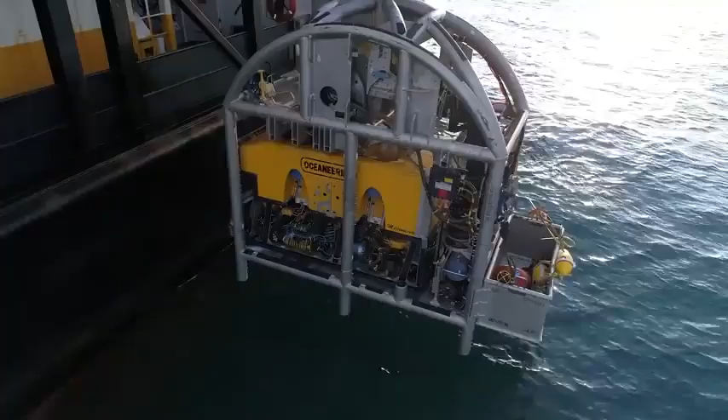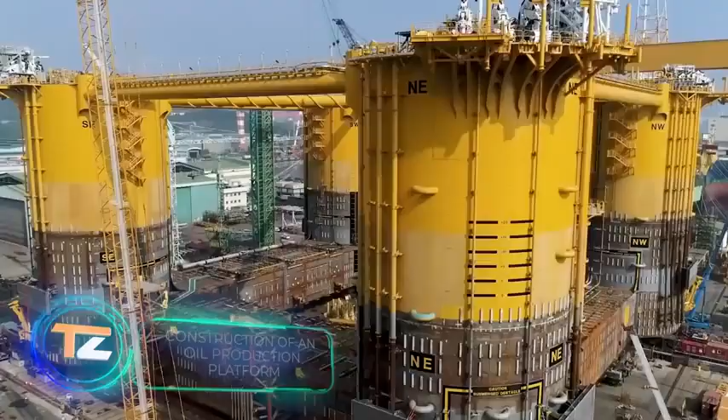Construction of an oil production platform. Appomattox Field is one of the largest oil deposits in the Gulf of Mexico. The British-Dutch company Shell built a new generation platform to extract oil there. Its dimensions are astonishing: 16 stories high and about 2 football fields wide. The rig weighs even more than an aircraft carrier.

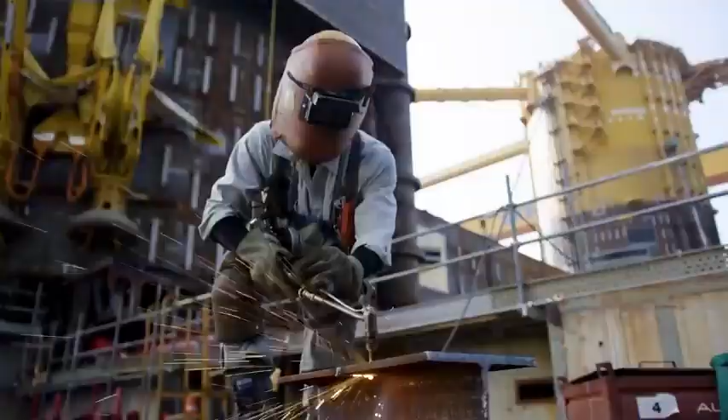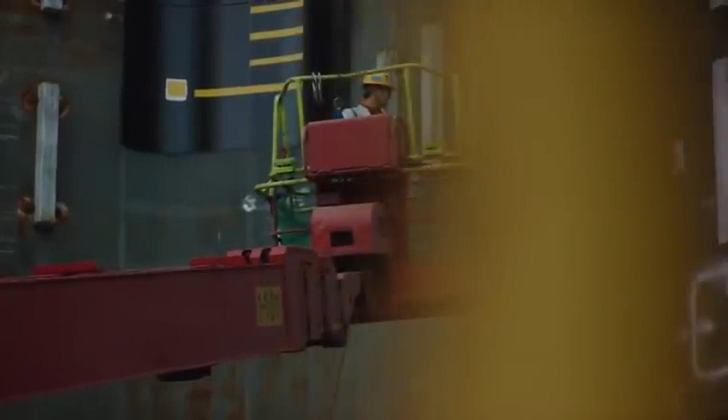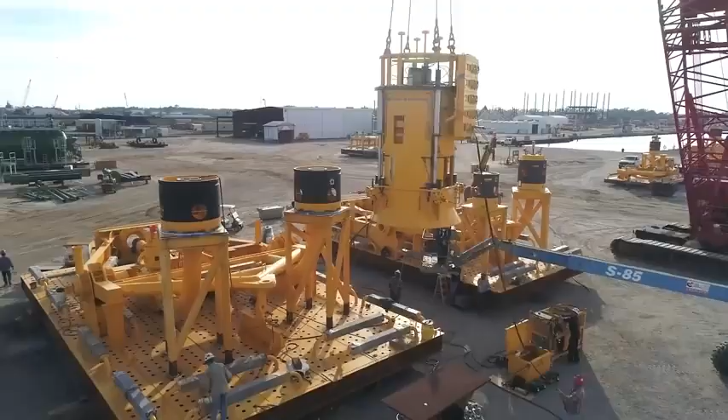Construction took about 4 years and took place in Geoje, South Korea. Several hundred engineers faced a real challenge: they had to build the most environmentally friendly, durable and large platform Shell had ever made. The plan called for a minimum lifespan of 40 years, double the lifespan of nearly all platforms built in the past. The complex construction process was broken down into several stages.

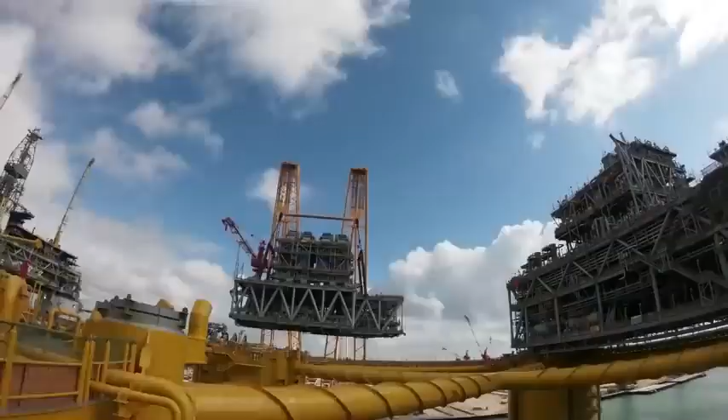The individual modules were first made in an onshore workshop. They were then lifted with a huge crane and assembled into a single structure. This took place on the water. The builders themselves described the entire process as assembling a giant three-dimensional puzzle.

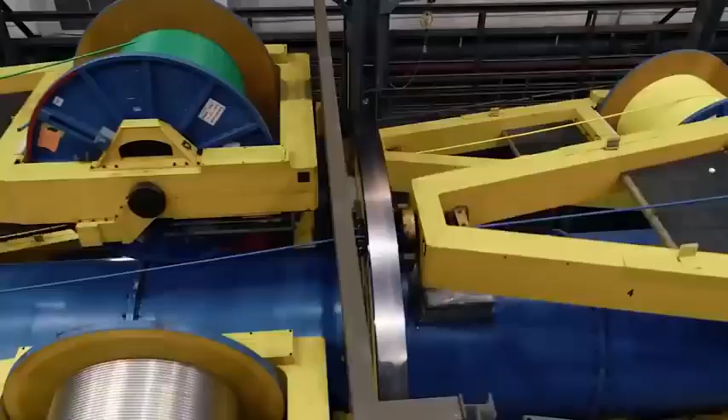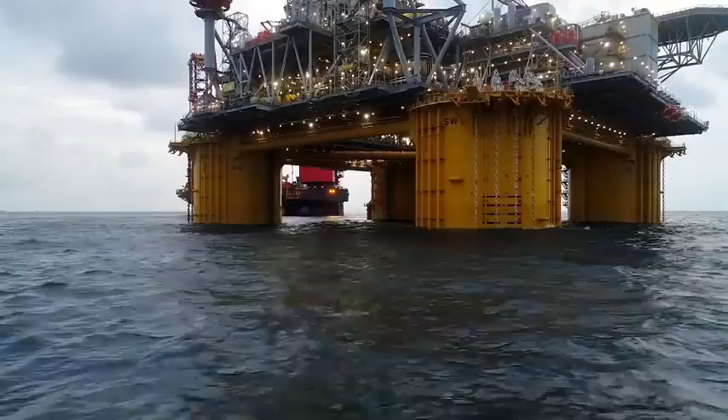Traditional oil rigs run on diesel fuel. In this case, however, it was decided to use electricity to make the project more environmentally friendly. The power of the generators installed on board reaches 150 megawatts. This is enough to supply electricity to about 100,000 homes.

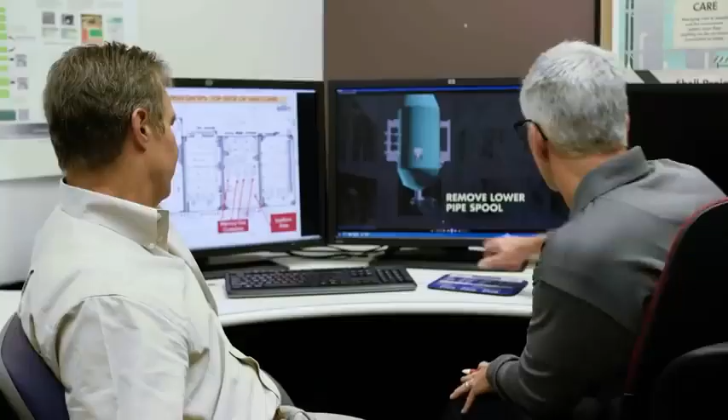But the engineers encountered a problem: the production of such an amount of electricity releases a huge amount of heat. Estimates showed that about 2.5 million barrels of water would be needed daily to cool the plants. By comparison, that's roughly the same amount of water needed per day for a city of 2 million people. This was too much for a platform that was supposed to be green.

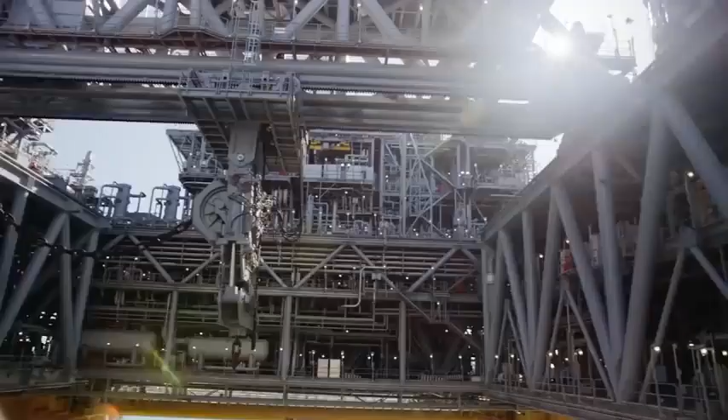So the engineers came up with an extremely interesting solution. Cooling water is taken from great depths, where its temperature is much lower. As a result, this reduced consumption by half.

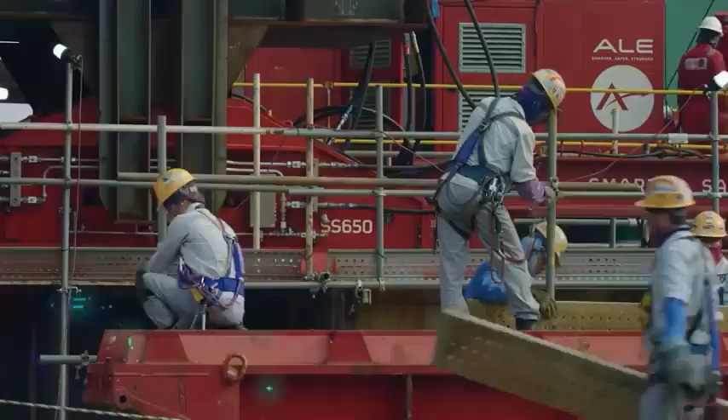Platform transport. Construction is not the only challenging part of launching oil platforms. The second most difficult challenge is transportation. To get from the South Korean shipyard to the Gulf of Mexico, the platform has to travel 14,500 miles, through the East China Sea, the South China Sea, the Indian Ocean, and then the Atlantic Ocean.

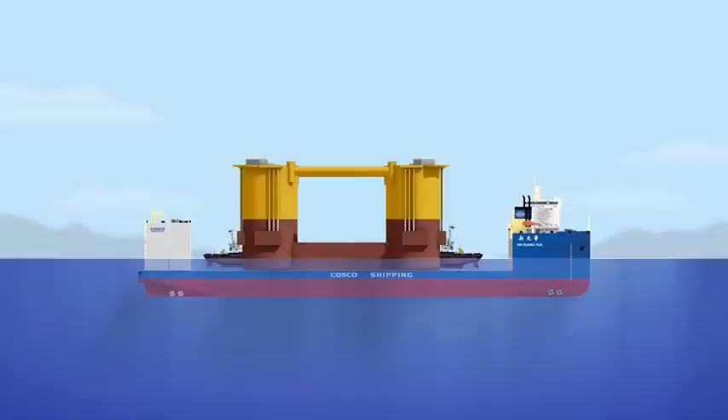Heavy lift ships are responsible for transporting such huge multi-ton structures. Their construction is unique: the deck is first submerged, allowing the platform to be placed above it. Then, when the deck is raised back up, the cargo is firmly secured above water and is ready to be transported. In this case, the Chinese vessel Xin Guang Hua, with a lifting capacity of about 98,000 tons, was chosen for the task.

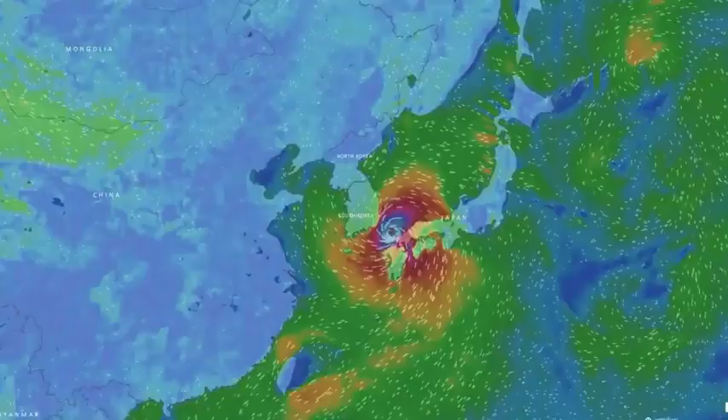Note that the weather conditions made things even harder. It turned out that a massive storm was approaching the shipyard from the Pacific Ocean. In order to avoid being affected by it, the work had to be accelerated considerably. The work crew alone was tripled for a short period of time.

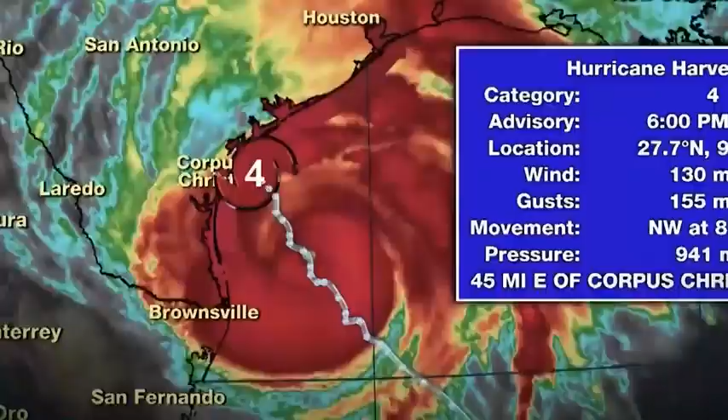Then, as the platform was already approaching the Gulf of Mexico, it was hit by Hurricane Harvey. Fortunately, all difficulties were overcome. After a 6-month layover in Ingleside, Texas, where the last construction work was completed, the platform finally arrived at its final destination.

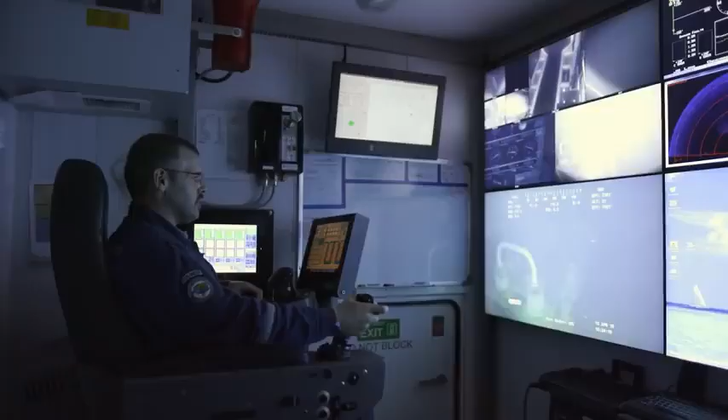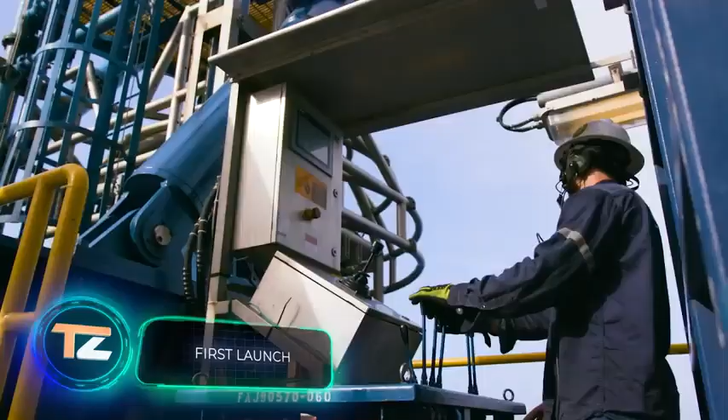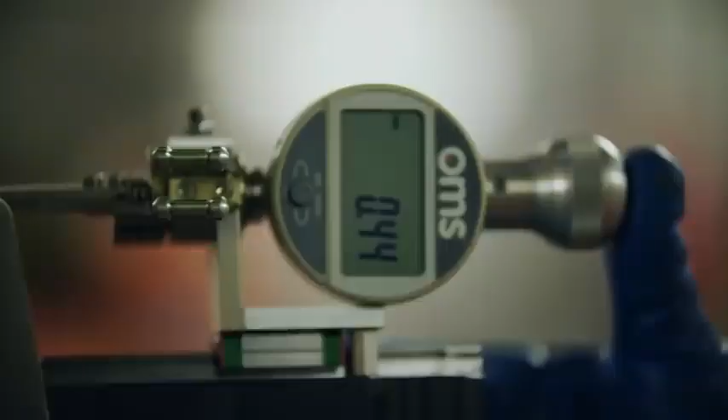First launch. Starting the circulation system in the platform and its official launching are extremely important events for all the people involved in the project. After all, this was preceded by 7 years of hard work. That's how long it took for the drawings and plans to turn into a real multi-ton structure. What you see on your screen now is the result, which required more than 15 million man-hours.

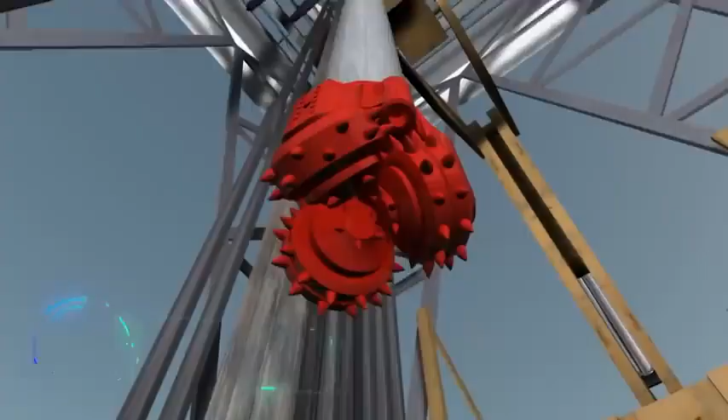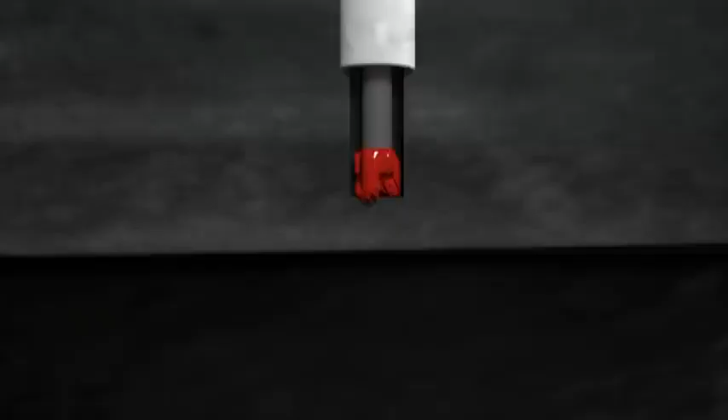Drilling. However, before an oil production platform can begin operation, a floating drilling rig must first drill the bottom of the ocean. Planning for this step can also take years. Specialists carefully study the sea floor to select the most suitable location to achieve maximum productivity and safety. In the case of Appomattox, the Gulf at its location is 1.5 miles deep. The oil itself is found even deeper, about 2.6 miles below the sea floor.

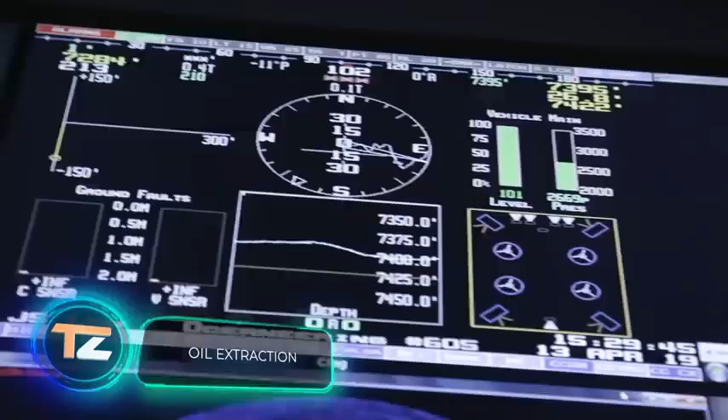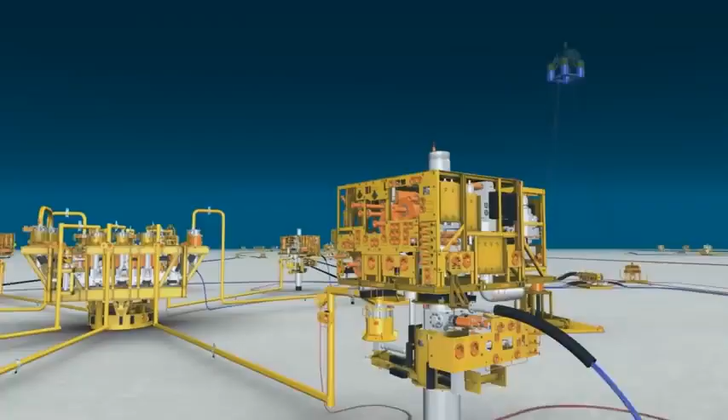Oil extraction. An oil production platform is more complicated than it seems at first sight, and it's not limited to the above-water structure alone. Before transportation begins, an underwater pipe system known as a Christmas tree is installed on the seabed. In this case, it consists of about 200 miles of complex piping connected to various types of equipment. In simple words, this system allows operators to regulate well operation modes and control the flow direction of the oil products. The total weight of this structure is 200,000 pounds.

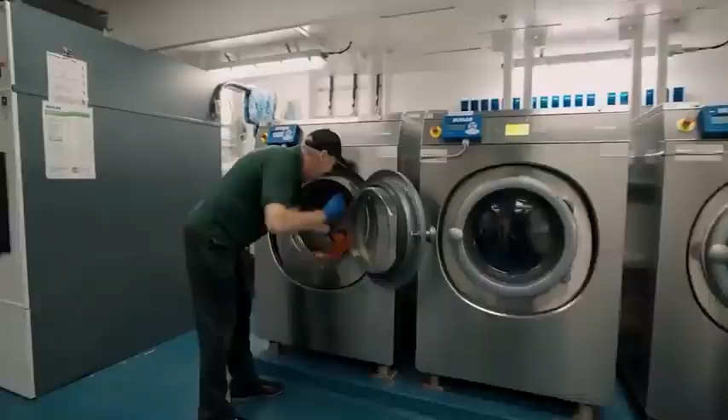The life and work of the employees. Oil production platforms can be hundreds of miles offshore, so personnel not only work but also live on them. Work shifts usually last several weeks. The number of personnel can reach a couple of hundred people, and comfortable living conditions are created for all of them. Workers live in small rooms, 2 people in each. They spend their free time in special game and music rooms. Separate employees are hired to serve the staff as well. They clean the cabins, work in the kitchen, and laundry. By the way, they do 3,500 pounds of laundry a day.

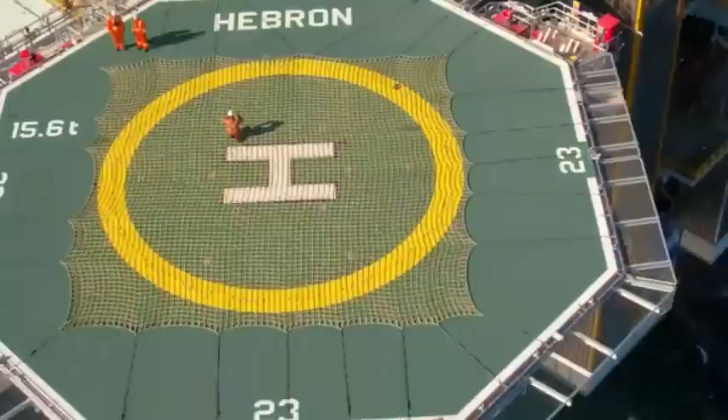Oil tankers. A single oil production platform can extract up to 5 million tons of raw materials per year. This huge mass requires timely shipment. Special oil tankers are responsible for this task. They're created exactly for transportation of crude oil and petroleum products. During their whole service life, they travel in turns between the production sites and the refineries. Every year, they carry 2 billion tons of crude oil around the world.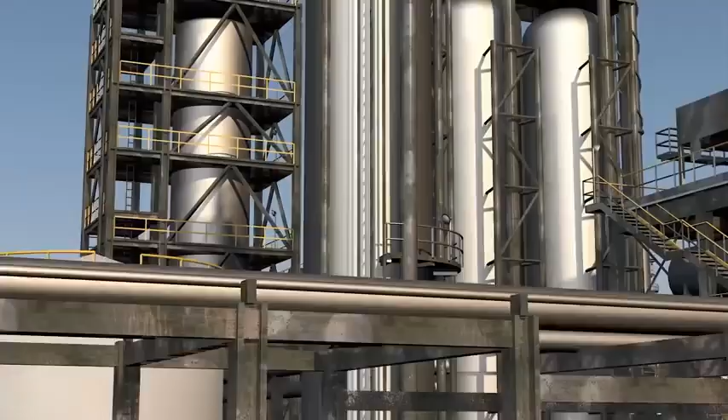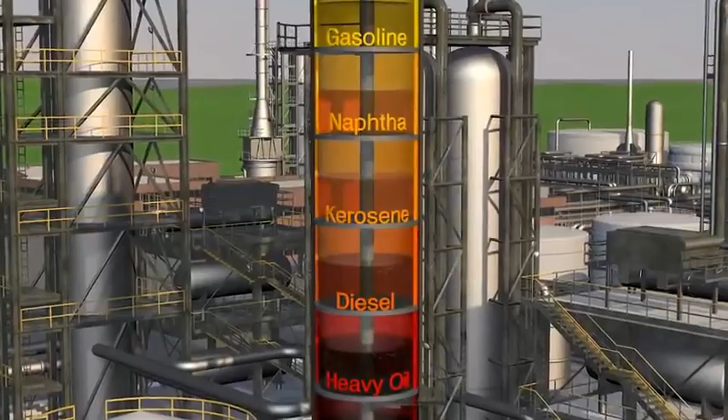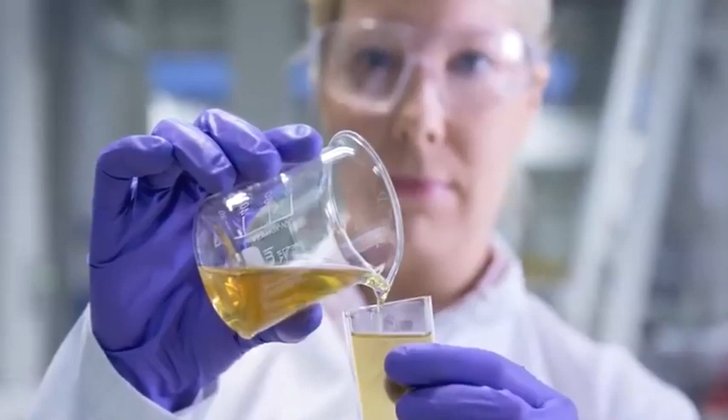Oil refining. Oil refineries are so large that they look more like small towns than factories. In all, more than 70 different kinds of products can be made from oil, but in any case, the process always begins by removing salt, water, and other impurities that can cause corrosion. The next step is heating the oil to 680 degrees Fahrenheit. The fact is that oil consists of substances that have different boiling points. Therefore, during gradual heating, special fractions are released in stages. There are 4 of them in total. The 3 light ones are subsequently used to produce gasoline, kerosene, and diesel fuel. The last fraction is the heaviest and the darkest, fuel oil.

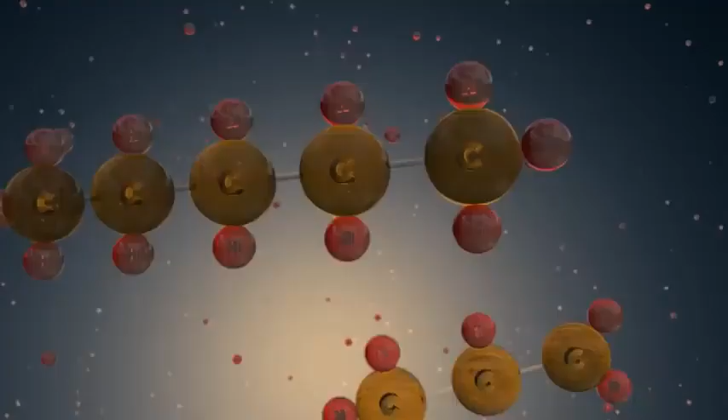After separation into fractions, a secondary processing follows. The future fuel is refined and then again divided into light and heavy mass. The latter is processed separately. In this way, the manufacturers improve its quality. In the last stage of production, different masses of petroleum products are mixed and special additives are added. This is how different types of gasoline are produced.

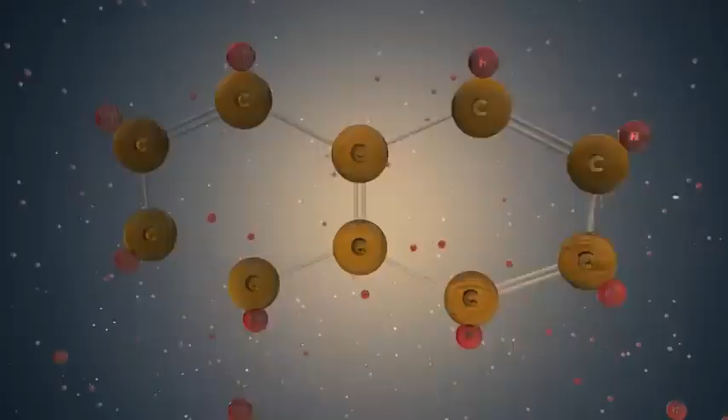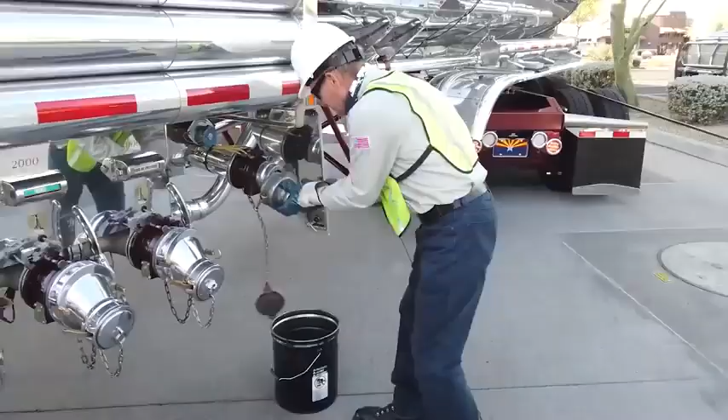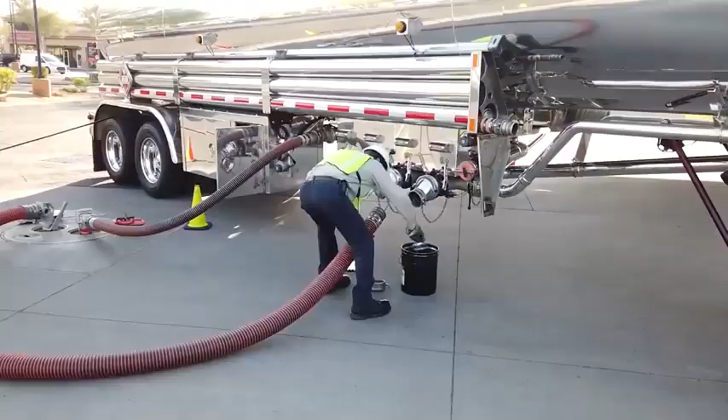Fuel tanker loading procedure. Special gas trucks are used to deliver gasoline from refineries to refueling stations. They don't differ much from ordinary trucks, but there are 2 main differences. First, their body has been replaced by a cistern. The second is that these vehicles have a much higher class of durability and fire safety, as they carry potentially hazardous materials. To use the equipment more conveniently, cisterns have a drain mechanism and openings for loading. The pressure inside the tank is regulated by special valves.

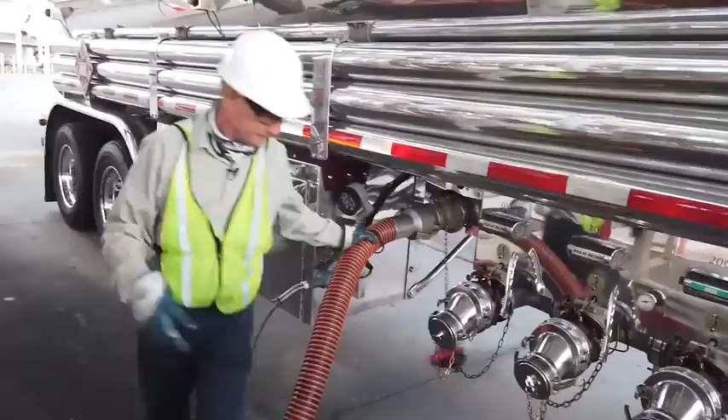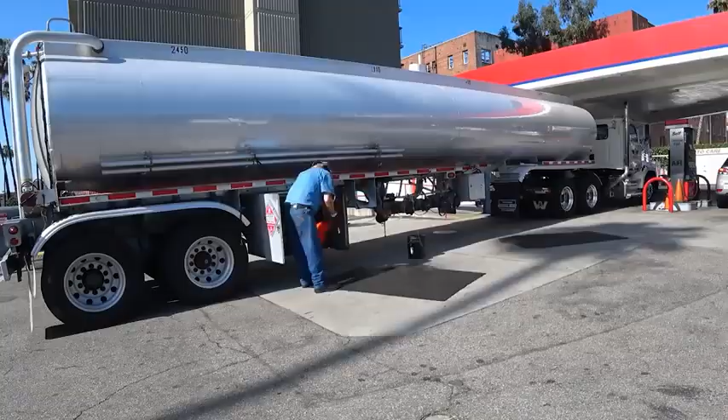Pumping fuel to a gas station. The last step in the cycle of turning oil into a product ready for sale is loading it into the fuel dispensers used by motorists. This procedure is not complicated and is performed by 1 or 2 people. A hose and a pump are connected to the fuel dispenser outlet, and the latter is responsible for pumping the material.